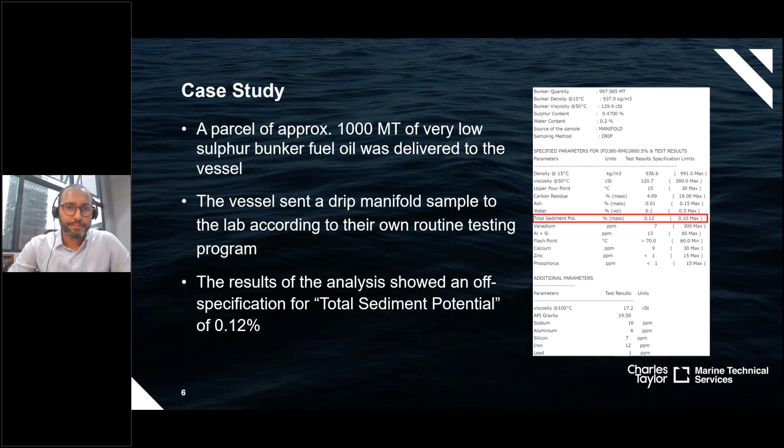Now, the first step of any investigation is to understand the type of off specification. You want to know what this off specification means for your vessel in terms of handling and or using the fuel. According to the type and also to the entity of the off specification, you have very different options.

For example, if the off specification parameter is just the viscosity, it usually is not that serious and may be easily dealt with on board by the crew. So you don't have to disembark the fuel just because it is off spec for viscosity, for example. If instead we're talking about cat fines, TSP, or other parameters, then it may be a serious matter, and it is well possible that your vessel just can't use the fuel oil at all.

So going back to TSP, what is TSP? TSP stands for total sediment potential, and it is a measurement of the stability of the fuel. Fuel oils are blends of various types of hydrocarbons, which have very different characteristics. It is important that these many components remain in a blend, meaning in a solution.

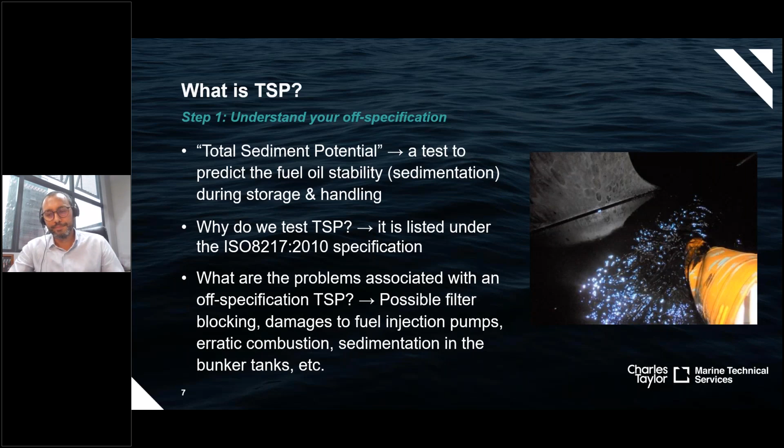So now we pass to what we did on board the vessel. This step can be called the collection of evidence. Now, why would we need to attend on board? The reason is simple. Before proceeding with a claim and all the issues related to it, you want to confirm that the fuel is actually and truly off specification. This because the laboratory, which found the TSP of 0.12%, may have made a testing mistake, or also it may have tested a sample which was not correctly taken by the crew during bunkering.

So what we did was taking samples from the bunker storage tanks, which contain this fuel. The samples were immediately sent for testing at the local laboratory, and the fuel was confirmed to be off specification, with the results ranging from 0.13% to 0.18%. You may note that the level of TSP had increased from the 0.12 initially advised by the laboratory to up to 0.18%, which means that the fuel became even less stable.

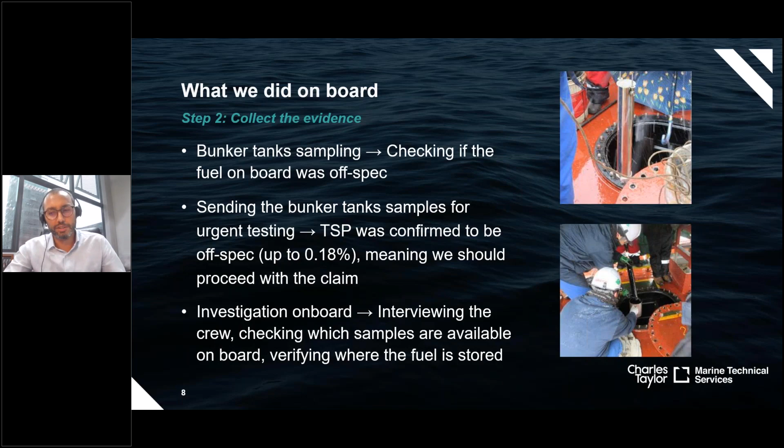In addition, we collected the relevant documents and verified which samples from the supply were available on board. These samples were disembarked by us and sent to our office in Singapore for arranging a joint testing. We pass now to what we did in the office. So the documental review is as important as attending on board. What you need to clarify is what is the contractual specification and which sample shall be tested in case of a quality dispute. You don't want to base a claim on the results of a sample which is not contractually relevant.

By reviewing the charter party and the BDN, we found out that the quality was based on the specification ISO 8217-2010, which has a limit for TSP equal to 0.10% maximum, and that the dispute should have been settled on the basis of one of the samples taken at the ship's manifold during bunkering and listed on the BDN.

So in order to proceed with the claim, we drafted a testing protocol in which we listed which samples would have been tested, at which laboratory, on which date, and according to which testing method. This was circulated to the parties in order to invite them to attend by sending their own experts and surveyors.

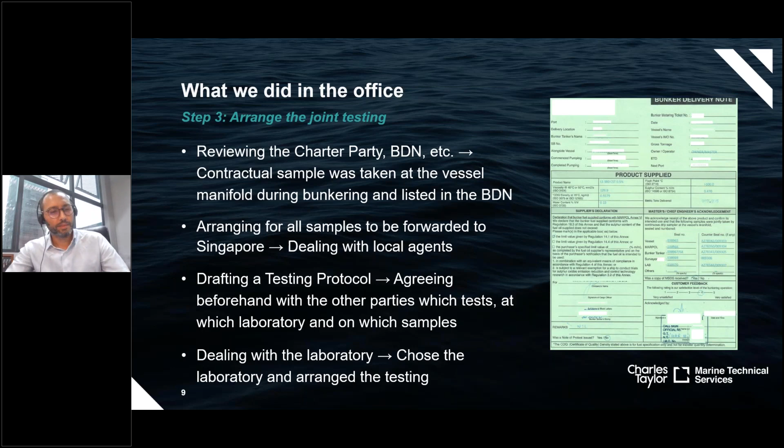Now, this is what we did in the laboratory. When we attended the laboratory with the representative of the charterers and the suppliers, we identified the samples and verified their conditions. Among the various samples, the one provided by the supplier was found to be allegedly tampered with. In particular, a hole was found between the bottleneck and the cap.

As you can see in the picture on the right side, this suggested that the cap had been pried off and the fuel inside changed with another fuel which we expect would have been in spec. On this basis, we rejected the sample, which could have been highly detrimental to the ship owner's claim. After that, we verified that the laboratory instruments were properly calibrated. These steps include a documental verification as well as running a trial test on a known result sample.

And once the analysis had been completed, the results obtained confirmed that the fuel oil was off specification, with the ship manifold sample giving a result of TSP of 0.13%, and the bunker tanks samples giving a result of up to 0.18%. You can see on the right part of the slide the results of the manifold sample.

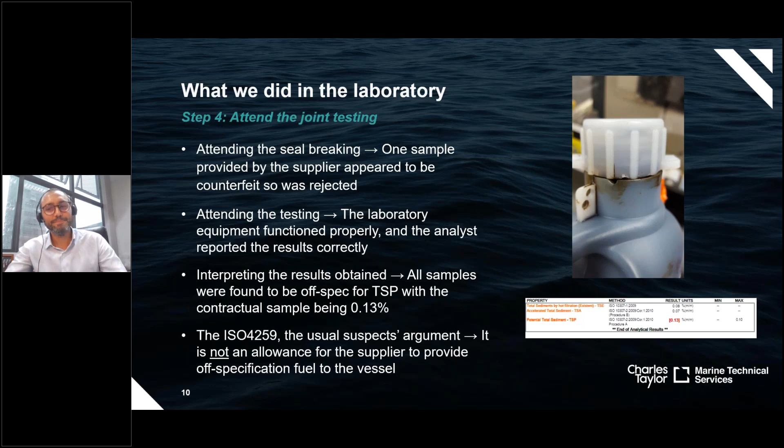So, what are the conclusions from this case? Well, first, for sure, and this is something that I stress to all my clients, keep in mind that your claim is just as good as the samples taken. If the crew or some surveyors attending on board take samples which are not representative, then the results obtained by the laboratory will be wrong for sure.

Second, make sure you know what your specification is and which sample is the contractual one. You want to avoid going through a joint testing operation, which may be expensive, only to have your results being not enforceable because the sample tested is not the contractual one.

And third, have an expert to guide you through the claim. This includes attending on board, reviewing the documents, and attending the seal breaking and testing operations. You want to avoid the crews taking unrepresentative samples, laboratories reporting wrong results, or even testing tampered samples, providing results which are detrimental to your case.

So thank you, it was a pleasure, and I now hand it over to Andrew, who will explain to you what happens to your ship when you do use an off-spec fuel.

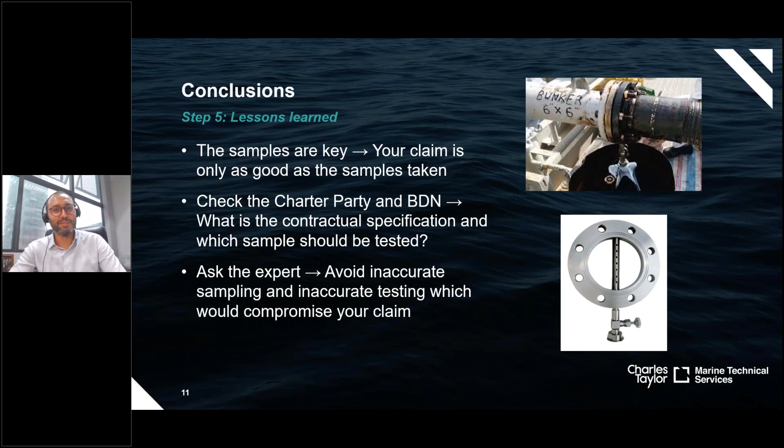Thank you, Diego. Good morning. My name is Andrew Kingshott, and I'm part of Charles Taylor Adjusting, a team of engineers who supply technical advice to adjusters when presenting a claim. And today I'm going to go through the technical aspects of the damages that are a result of poor quality bunkers.

We're going to split this into three main sections. We're going to have a look at the fuel storage on board, what the crews can do in order to handle the fuel, in order for it to be used within the engine, and also the types of damages we see when claims are presented where we have contamination of the fuel.

When we're talking about storage, we look at the fact that bunkers should always be loaded into tanks that are empty. We also have a look at the stability of the fuel. So the correct management on board is quite essential. We'll also be having a look at the handling of diesel fuel. It's becoming more common, however, it's not without risk of contamination.

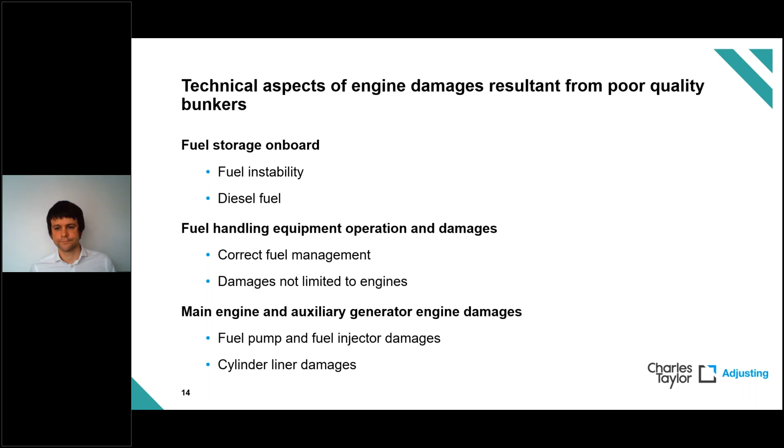An additional point that is being noted now since IMO 2020 is the temperatures in which we handle these fuels. So, fuel storage on board. With IMO 2020, vessels are now taking on different blends of fuel; it's a shift from HFO and MGO. We're now having very low sulfur fuel oils and ultra low sulfur fuel oils.

So once the fuel has been bunkered, it's up to the crew to ensure that the fuel is handled correctly. However, you also have to make sure as crew that the fuel that has been bunkered will not cause problems with stability should it be consumed. After bunkering, you're supplied with a bunker delivery note. However, owners should always do a third-party analysis on the bunkers, as the bunker delivery note does not always supply all the information on the components of the fuel. And it's not unheard of to have fuel that may be off spec even though the bunker delivery note says otherwise.

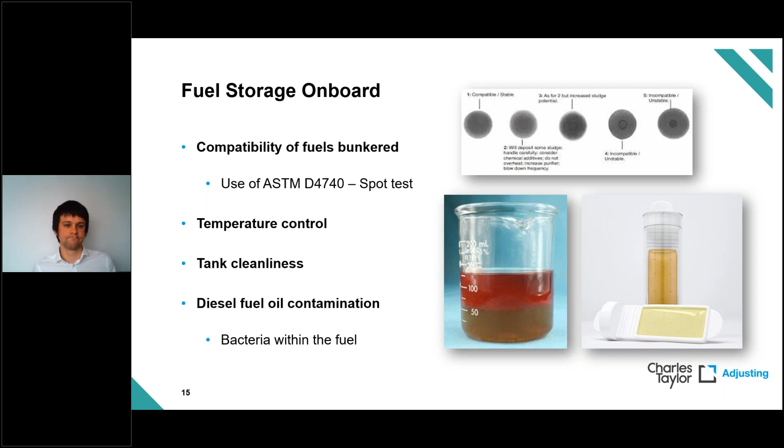Phenols, on the other hand, you will not know about, because they're not generally tested for, even as part of third-party fuel oil analysis. Phenols are a particularly sticky substance and can cause varnishing of components such as fuel pumps and injectors. Fouling of fuel oil separators is also becoming more common with the use of low sulfur fuel oils and ultra low sulfur fuel oils. One aspect that's been raised quite a bit is the temperature to which the fuel is heated to achieve the separation, to remove not only particulates but water within that fuel.

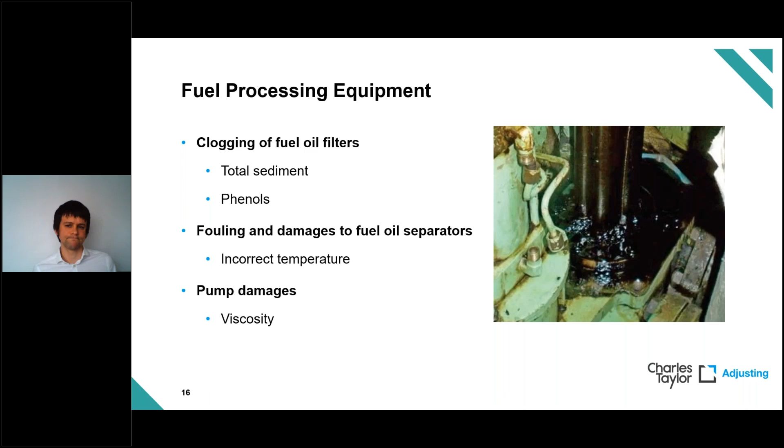When we look at the fuel pump and injector damages themselves, what we tend to see is, in the event of catalytic fines, for example, you'll find there is wear to the plunger within the fuel pump, and that's down to abrasive wear. It is very important that the fuel is clean as it goes into these engines, because the tolerances that these components are machined to are very fine. So it only takes a very small amount of contamination for these to damage.

But not only that, it's not only mechanical abrasion that can cause damages to these fuel pumps. We also look at corrosive and chemical damages to fuel pumps. When we do have contamination of the fuel, particularly in the case of catalytic fines, we tend to see the progression time of the damages to be quite short. And not only that, the damages are spread across the whole of the engine. It's not normally localized to just one pump or one unit.

And as the engines have evolved from your MC to ME or your electronic engines, you will also find damages to the injection control units, which aren't normally overhauled by the vessel crew. So this can incur additional costs to the owner.

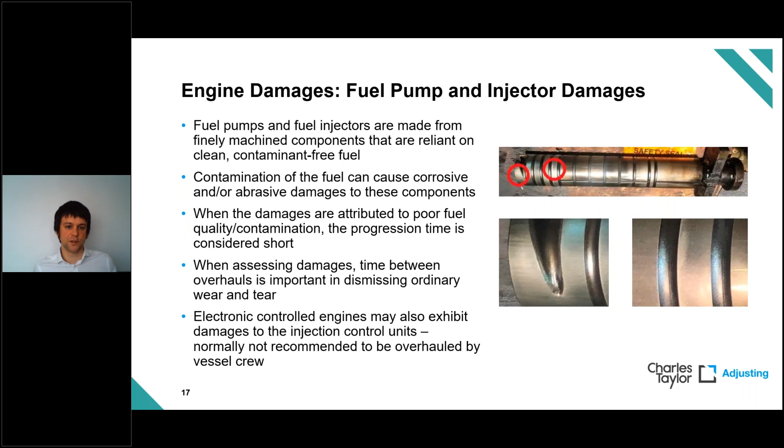Now, it is normal for fuel to pass around the side of the plunger, between the plunger and the barrel, for lubrication. However, if you have a high concentration of catalytic fines, it will also draw down those fines into that space and wear away the plunger.

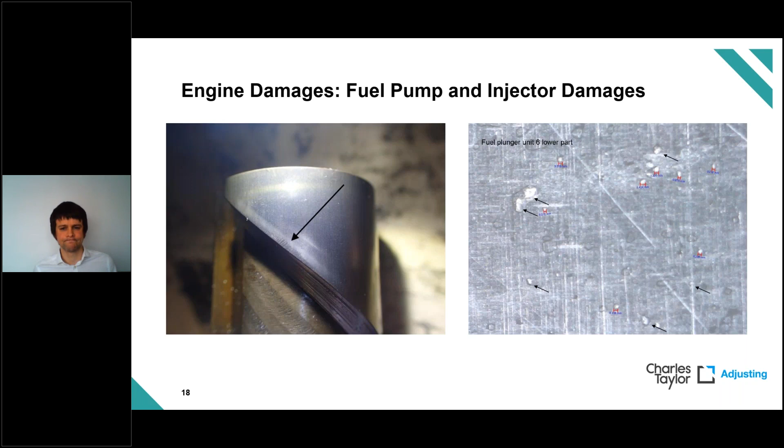As discussed previously, we also have corrosion. Now, ISO 8217 goes through your basic requirements of fuel. It does not go through the requirement to test for chemicals or chemical contamination. And that's prevalent in cases where we have high concentration of phenols, for example.

However, there is a clause that fuel should be free of any material that renders it unacceptable for use in marine applications. And it's something that Wärtsilä notes, particularly in their technical advice RT126 data and specifications notice, where they say that chemical waste in the fuel can lead to damage in the fuel injection components, rendering them inoperable. So they do suggest testing the fuel for chemical contamination.

However, this is not a common test done. Normally, when you do a third-party test, you do get the full results of what you might not have in the bunker delivery notice. However, it might not necessarily outline the presence of phenols.

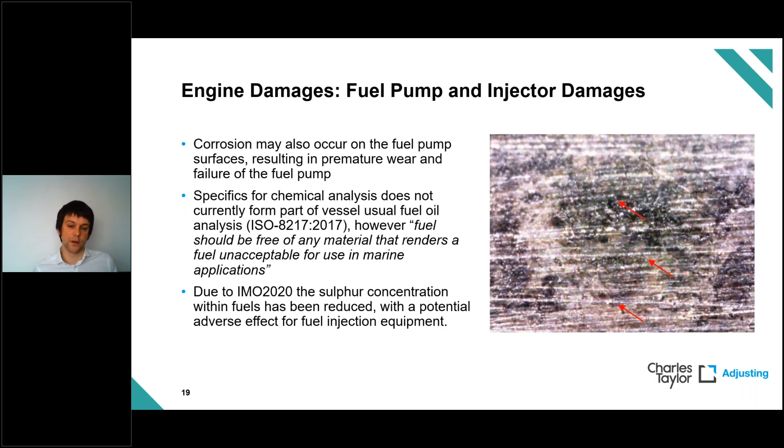Additionally, the sulfur concentration within the fuels has an element of lubricity. With IMO 2020, we've now reduced the sulfur content within that fuel, and therefore you reduce lubricity. And this has been highlighted again by Wärtsilä in the fact that their ICUs, the injection control units on their electronic engines, are designed for residual fuels. And subsequently, they have advised that the time between overhauls has been reduced by 25% if you were to start using very low sulfur fuels. And that's noted in their business white paper in relation to running two-stroke engines on low sulfur fuels in way of IMO 2020.

Another part of the system which is affected by contamination, not only the injection equipment such as the pumps and the fuel valves, but we also have a look at the fines that are embedded within the surface of the cylinder liner, and this is where we get a lot of abrasive wear between the piston and the liner. And what tends to happen is the catalytic fines, should you have a high concentration of them, will embed themselves into the open structure of the surface of the cylinder liner, and therefore it reduces the efficiency of the lubrication of the cylinder liner. Then you get abrasive wear and in some cases adhesion.

MAN suggests that a concentration of 200 fines per square centimetre is considered healthy and normal. However, when we have damages, we will take a sample of the liner and we'll be able to see the actual concentration that is present on the liner.

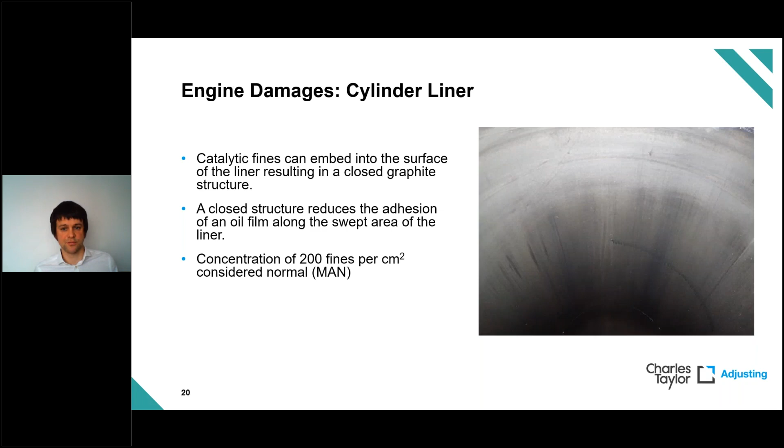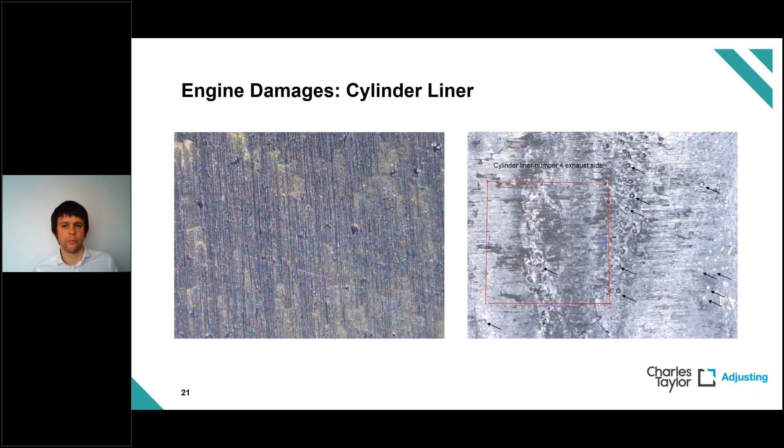Another element of the engine which is affected by fuel contamination is your piston and piston ring damage. As the piston travels up and down the liner, it will have abrasive wear, and that will damage your piston rings and the piston.

In extreme cases, you may have wear to the stuffing box and piston rod. We have seen in some cases, not very often, that the system oil has also been contaminated due to the stuffing box having experienced severe wear.

If the cause is not identified, and it only affects one unit, it will generally affect all the units. Unless you identify that you've got a high concentration of catalytic fines, abrasive wear will continue to the other units. Even after overhaul, it's not uncommon for us to see the same unit overhauled twice because the identification of catalytic fines, for example, has not been made.

And a lot of this can be managed on board. Should the fuel be poor but within spec, you can still condition it using centrifugal purifiers on board. The golden rule is to try and ensure that the flow rate through that purifier is the same or slightly over your consumption. We do see sometimes that the fuel is being passed through the separator too quickly, so it doesn't have enough time to separate those contaminants out of the fuel.

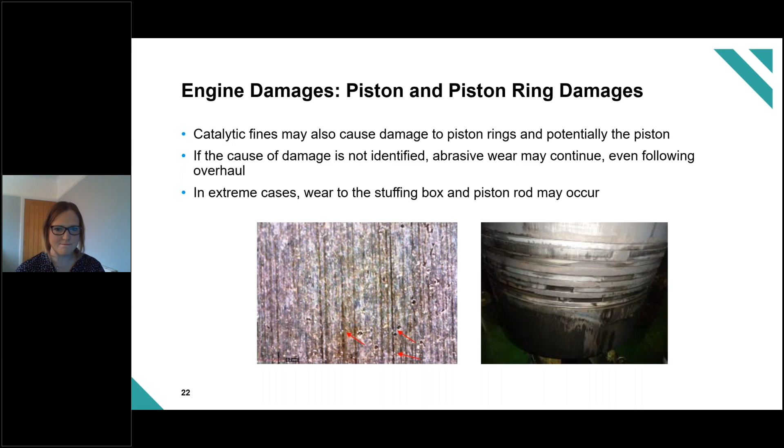Okay, I hope you can all see that. So I'm going to talk now from the adjuster's perspective about some of the issues that can arise when adjusting claims for damages that result from the use of off-spec or contaminated bunkers on board the vessel.

Claims for damages arise from the use of contaminated bunkers, and from time to time adjusters see those. But there are also occasions where there are a spate of these type of claims. For example, you might recall claims arising from the use of off-spec bunkers supplied in ports on the US Gulf Coast in 2018, which gave rise to a significant number of claims for damages to vessels, varying in severity. We've also seen similar instances with bunkers supplied in Panama and also in Singapore.

And the reason this particular contamination is an issue for ship owners and their insurers is that it's not customarily picked up on the standard testing, so the contamination goes undetected.

So if we consider a case example to illustrate some of the issues: our vessel is trading across the US, Europe and the Middle East, and on the 29th of April, the vessel loads bunkers into two empty tanks in Houston, USA. It departs the next day for various ports in the US and Europe. I should point out that the bunkers were taken on in accordance with the vessel's procedures for safe bunkering.

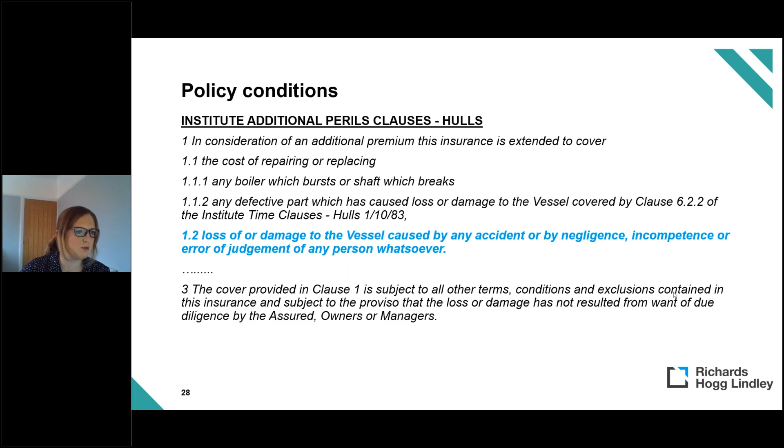We're going to pause here for some polling questions for the audience. Given the cause of damage which we've heard already, do you think there would be coverage under ITC Hulls 1/10/83 alone within the policy?

I think that is most people, or 60%ish think yes, 25% possibly.

And what about if the policy had the additional perils coverage that we just spoke about?

Yeah, everybody's quite happy if there's additional perils that there will be coverage. Okay, great, thank you.

When we're looking at this type of damage resulting from fuel issues, there are generally two potential categories of causes: the first is that off-spec bunkers were simply loaded and the owners were unaware of this, and the second is when there's an intervening act of negligence that results in the bunkers being unfit for use. For example, crew negligence in the purification process or standard treatment of bunkers on board - they did something incorrect in that procedure, and it resulted in bunkers which were suitable for use becoming unfit for use. In our case, the bunkers were found to include contaminants, and they were off-spec from the start.

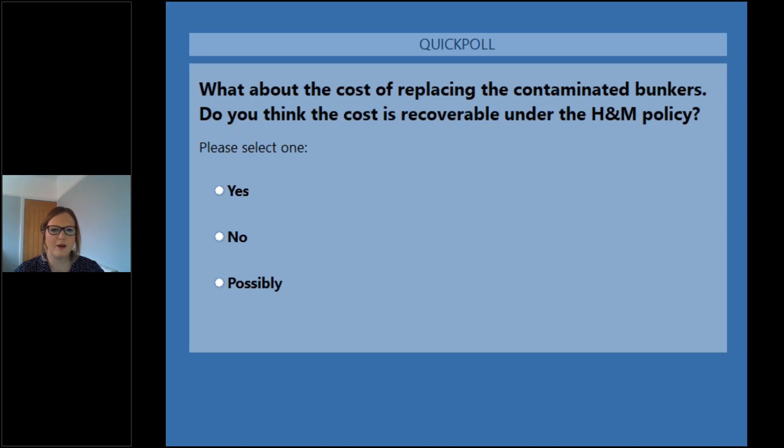Well, in this case, because the oil was not contaminated by an insured peril, the cost of replacing the oil itself is not going to be allowed as part of the claim.

Oh sorry, I should have moved on to the next slide. Yeah, the loss of the bunkers itself is not going to be recoverable. It wasn't contaminated as a result of an insured peril. They were loaded in an off-spec condition already, so there's no claim on the policy for that loss.

The same goes for the discharge of these off-spec bunkers and reloading new fuel. That wouldn't be recoverable either, because the fuel itself isn't allowed, and you have to look at the predominant reason that the fuel was offloaded. There's often an argument that the cost of discharge should be treated as part of the cost of cleaning the tanks, since it had to come off to clean the tanks, so it should be part of the damage repairs. But that's not really the primary purpose for the discharge of the fuel in this kind of case. The primary reason is because it's unusable, it needs to be removed from the tank so it can be sold or disposed of.

So it doesn't form part of the reasonable cost of repairs, and it's similar to discharging worthless cargo at destination to enable repairs. It was established in Field v. Burr back in the 19th century that discharging of worthless cargo wasn't going to be recoverable from H&M as part of the damage repairs.

The cost of cleaning the contaminated fuel oil tank itself, once the fuel is out, is reasonably allowed as part of the cost of damage repairs to the vessel, as a direct consequence of those contaminated bunkers being on board.